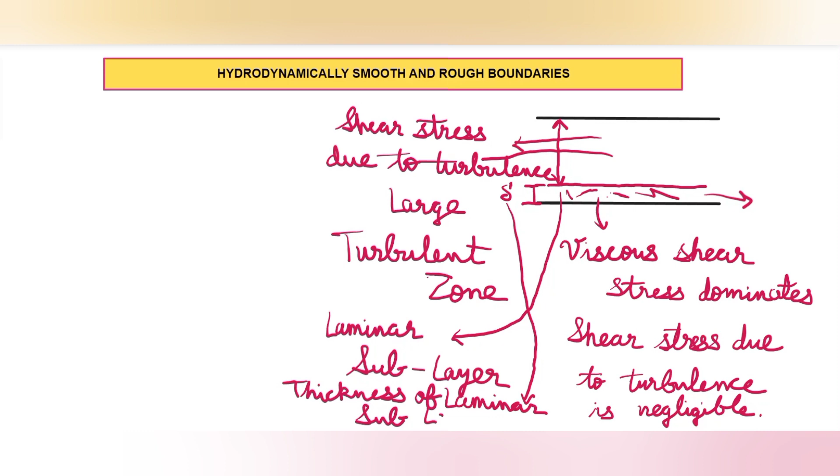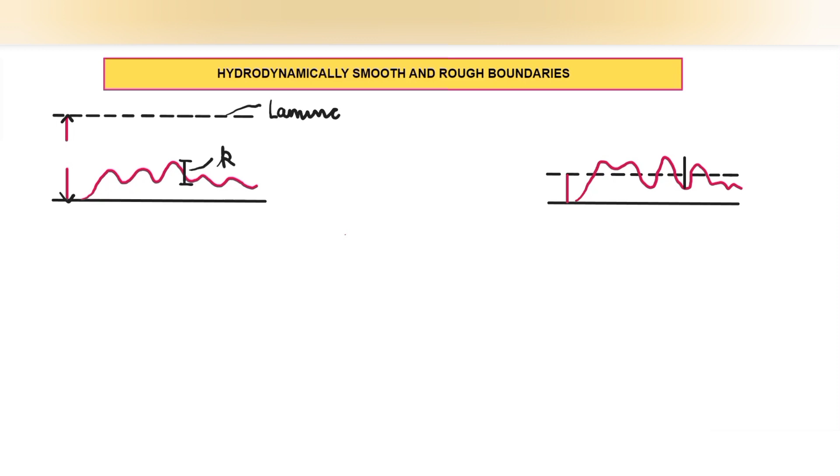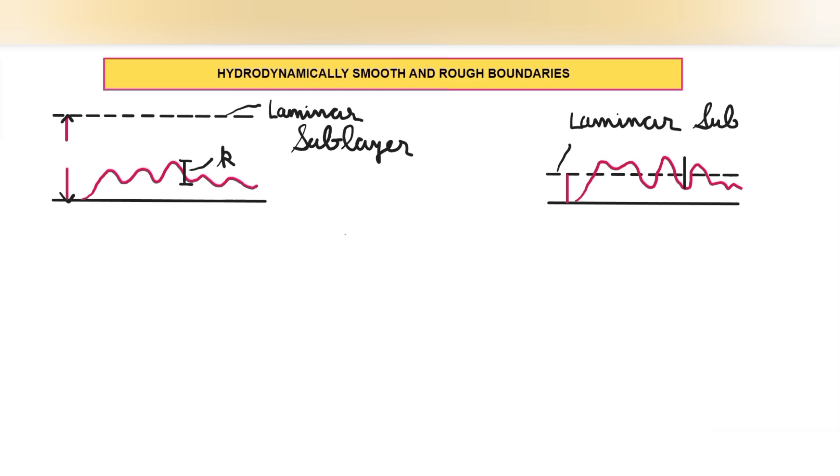Now let's understand the difference between hydrodynamically smooth boundary and hydrodynamically rough boundary. As you can see in the diagram, these are my irregularities, and K is the average height of irregularities projecting from the surface of the boundary. This is my laminar sublayer, and in the second diagram, this is also my laminar sublayer, with thickness denoted by delta dash.

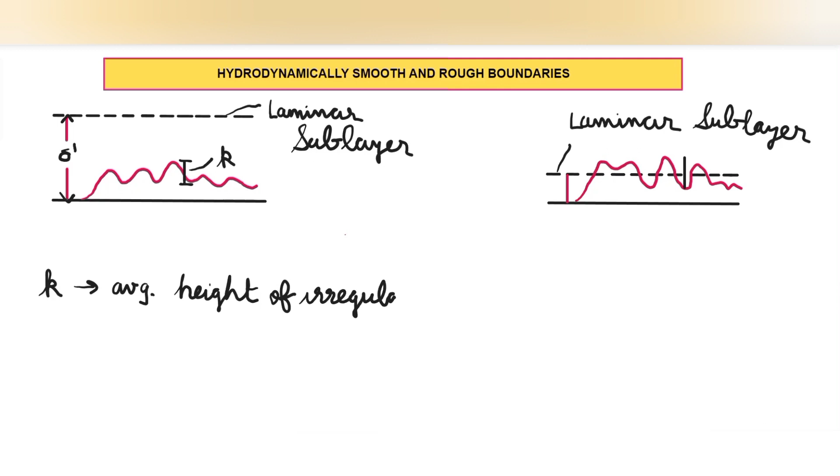Now as you can see in this first diagram, the average height of irregularities is quite small compared to the thickness of the laminar sublayer. That means K is less than delta dash. This type of boundary, where K is less than delta dash, is known as hydrodynamically smooth boundary.

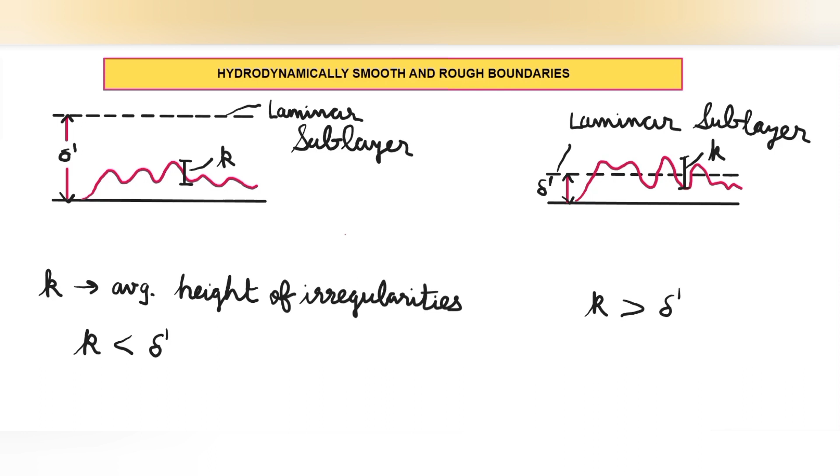In the other diagram, the average height of irregularities is more compared to the thickness of the laminar sublayer, that is, K is greater than delta dash. This becomes my hydrodynamically rough boundary. So the first diagram is smooth boundary and the second is rough boundary. For smooth boundary, K is less than delta dash; for rough boundary, K is greater than delta dash.

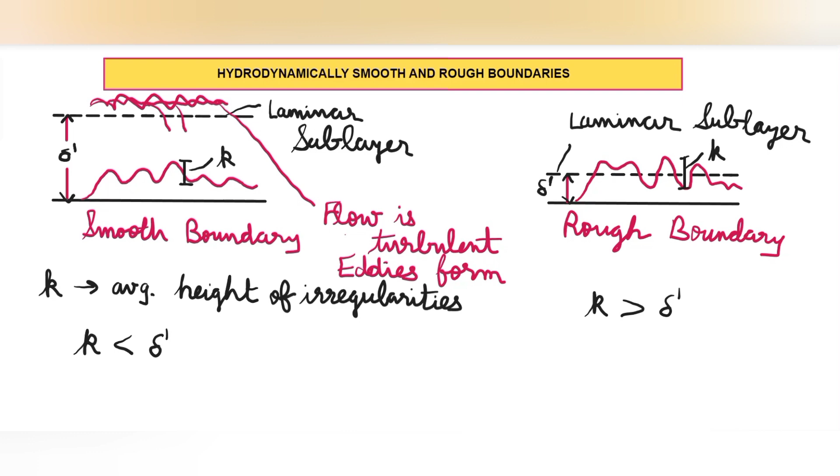Another thing to understand: above the laminar sublayer, where the flow is turbulent, eddies formation starts, and these eddies will try to penetrate the laminar sublayer, trying to come close to the boundary.

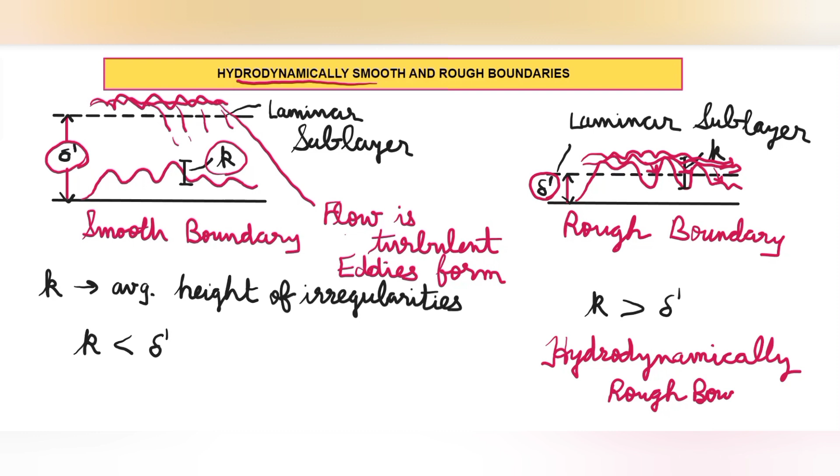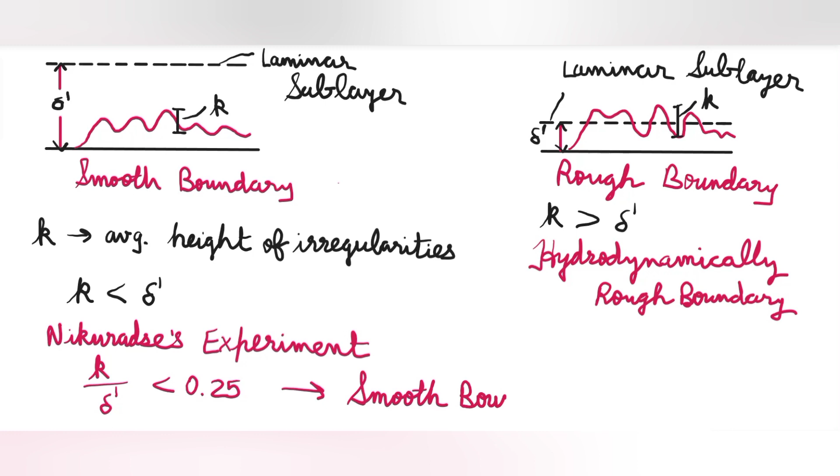The next thing we want to see is there are some values given by Nikuradse and Reynolds by which we can decide whether a boundary is smooth or rough. Let's see both of these: Nikuradse's experiment and the Reynolds number criterion. As per Nikuradse's experiment, it is related to the K upon delta dash ratio. If K upon delta dash is less than 0.25, then that type of boundary is called smooth boundary.

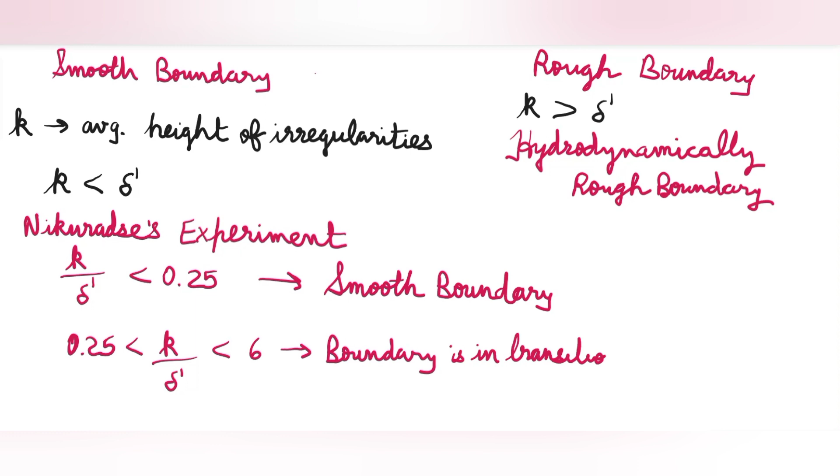Then, if K by delta dash is between 0.25 and 6, that type of boundary we call boundary in transition. You need to remember two values, 0.25 and 6, and the ratio is K by delta dash, that is average height of irregularities to thickness of the laminar sublayer. And if K by delta dash is greater than 6, then that boundary is a rough boundary.

Same way, Reynolds has also given a classification, as per Reynolds it is U star K by nu. U star is the shear velocity, K is the average height of irregularities, and nu is the kinematic viscosity. So for U star K by nu, if this ratio is less than 4, we call that boundary a smooth boundary. If this ratio is between 4 and 100, the boundary is in transition. And if U star K by nu is greater than 100, the boundary is a rough boundary.

So for Nikuradse, K by delta dash, two values are 0.25 and 6, and for Reynolds number, U star K by nu, two values are 4 and 100. This is what you need to remember.

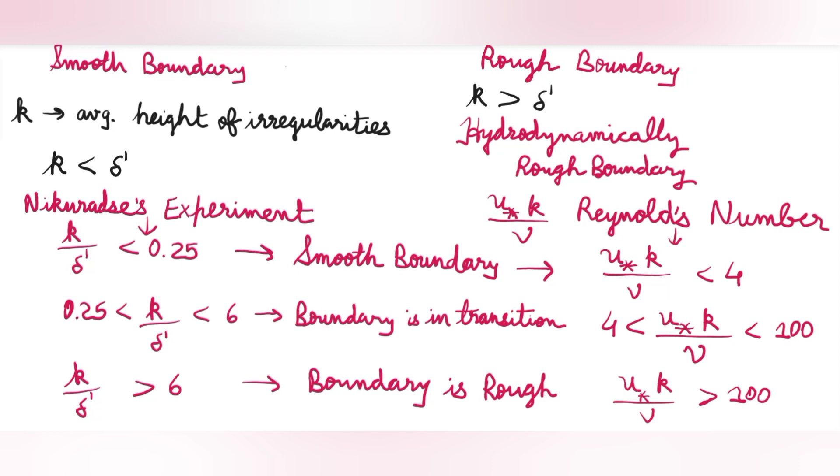Next, we'll derive the equation for velocity distribution for turbulent flow in smooth pipes and in rough pipes. Here we'll derive the equation for velocity distribution firstly in smooth pipes and then for rough pipes.

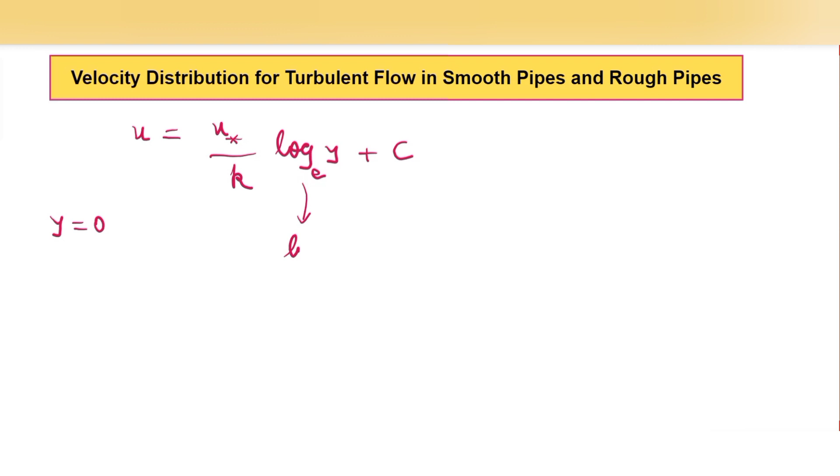We already know the velocity distribution equation for turbulent flow in smooth or rough pipe, which we had derived: U is equal to U star by K log y to the base e plus c. Here we can see from this equation that if I put y as 0, then u will come out as minus infinity, because log 0 is equal to minus infinity. That is, when y is equal to 0, then u is equal to minus infinity. At the wall where y is equal to 0, velocity is minus infinity. So away from the wall, there will be some distance where velocity is positive. We can say that at some finite distance away from the wall, velocity will be equal to 0.

Now that finite distance from the pipe wall, let's denote it as y dash. So we can say that when y is equal to y dash, velocity is 0. Placing these values in the above equation, we'll get u is 0. Therefore, 0 is equal to u star by k, and in place of y we put y dash: log y dash to the base e plus c. So we'll get c is equal to minus u star by k log y dash to the base e.

Now we can place the value of this constant of integration in our equation. U is equal to u star by k log y to the base e plus minus u star by k log y dash to the base e. So it will be u star by k times log y minus log y dash. Subtraction will change to division. Therefore we can write u is equal to u star by k log y by y dash to the base e.

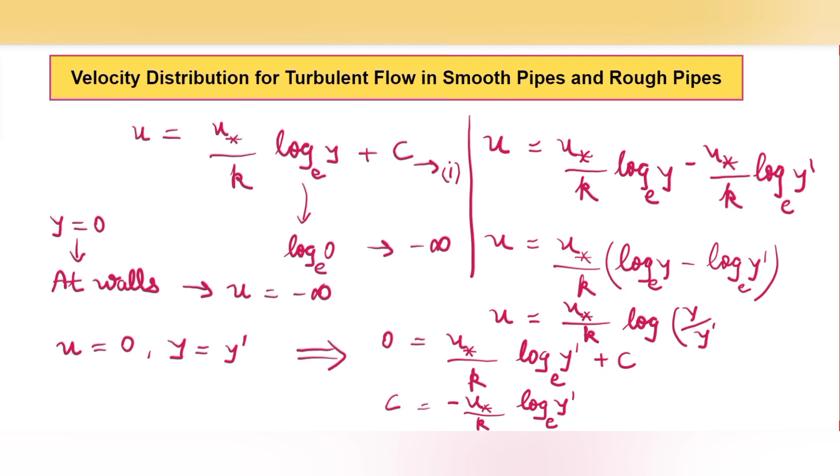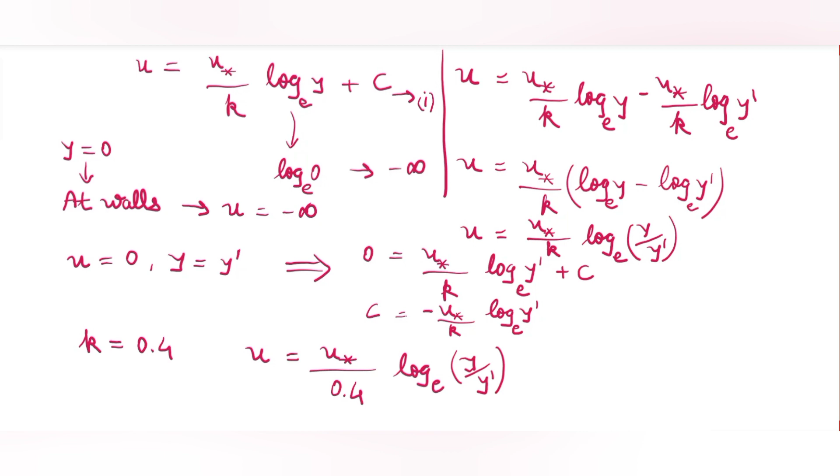Then we also know the value of Karman's constant, which is equal to 0.4. Placing that here, U is equal to u star by 0.4, which is equal to 2.5 u star log y by y dash to the base e. We can also change log base e to log base 10 by multiplying with 2.3: 2.3 into 2.5 u star log y by y dash to the base 10. This gives u by u star is equal to 5.75 log y by y dash to the base 10.

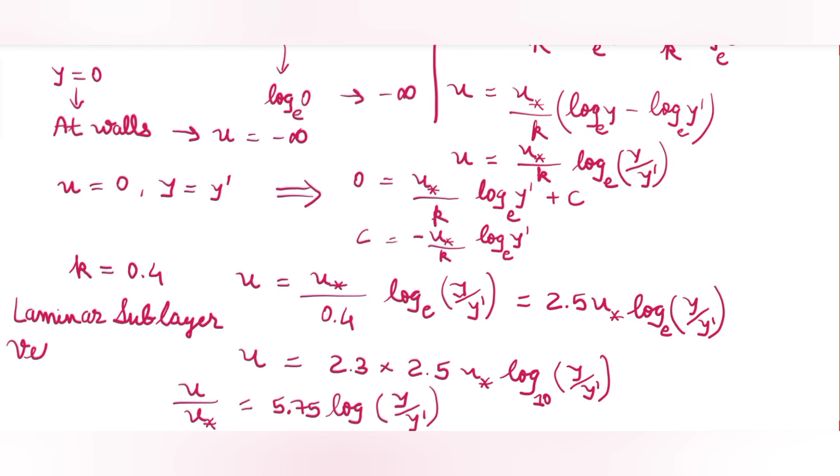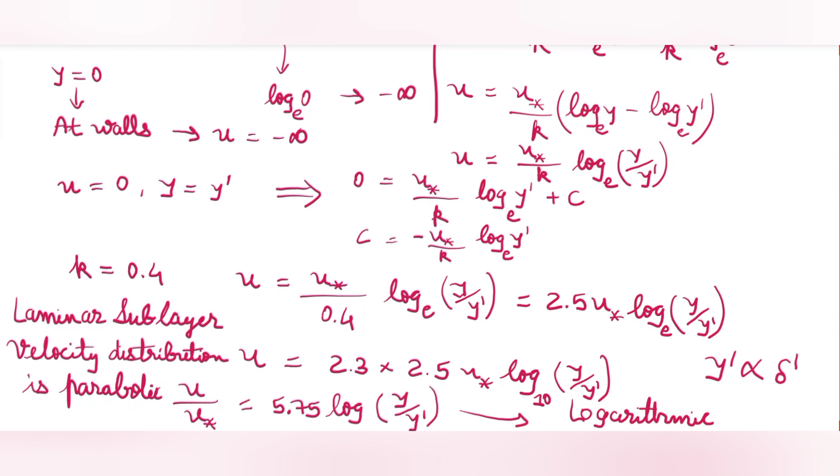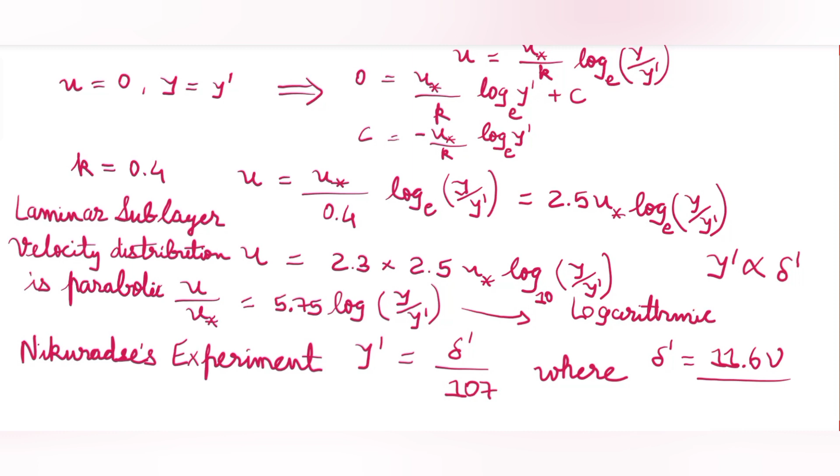Now for smooth boundary, there exists a laminar sublayer, and as discussed, as per the universal Prandtl's velocity distribution equation that we found, the velocity distribution was logarithmic in nature. But because the laminar sublayer exists, the logarithmic velocity distribution does not hold good, and the velocity distribution is parabolic in the laminar sublayer. So it was assumed that y dash is directly proportional to the thickness of the laminar sublayer, that is delta dash. As per Nikuradse's experiment, he gave the value for y dash, which is equal to delta dash upon 107, where delta dash is equal to 11.6 nu by u star. Nu is the kinematic viscosity of the fluid and u star is the shear velocity.

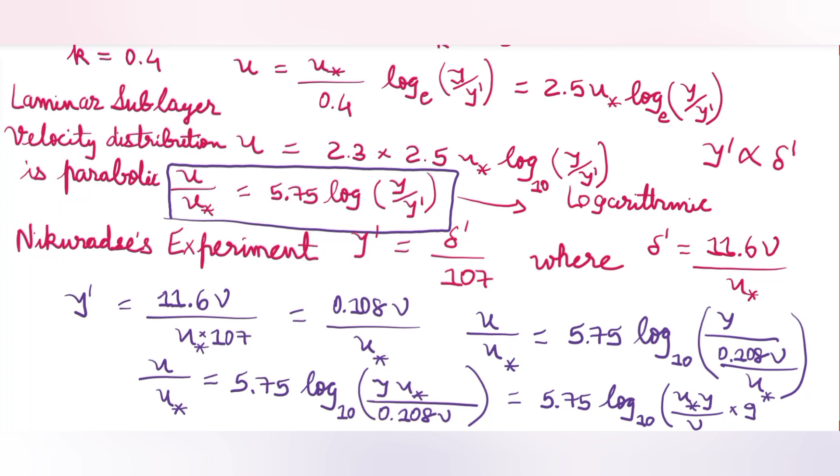We can place this. Y dash is equal to 11.6 nu by u star, into 107, because delta dash is 11.6 nu by u star, so we get 0.108 nu by u star. Now let's place this in the equation. U by u star is equal to 5.75 log y divided by y dash, which is 0.108 nu by u star. U star will go up, so it will be 5.75 log of u star y upon 0.108 nu, and 1 upon 0.108 is equal to 9.259. So we get u by u star is equal to 5.75 log of u star y by nu into 9.259.

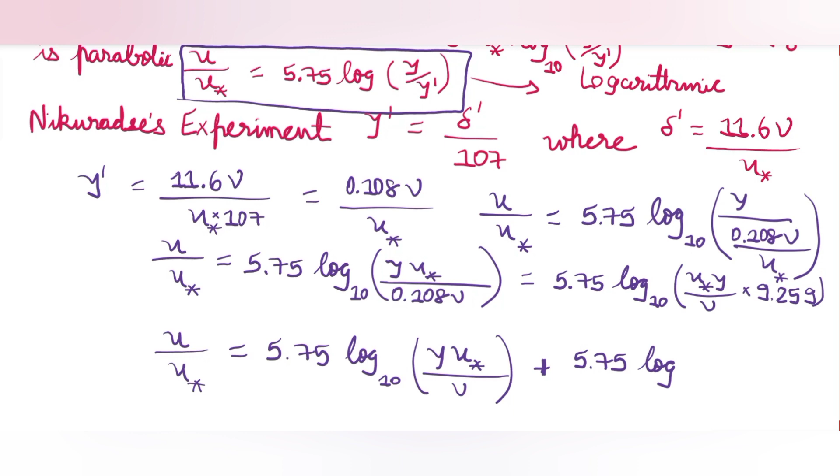Now this multiplication will change to addition. U by u star is equal to 5.75 log u star y by nu, plus 5.75 log 9.259, and log of 9.259 into 5.75 is equal to 5.55. Therefore we get u by u star is equal to 5.75 log u star y by nu to the base 10, plus 5.55.

So this is the equation that you need to remember for velocity distribution of turbulent flow in smooth pipes.

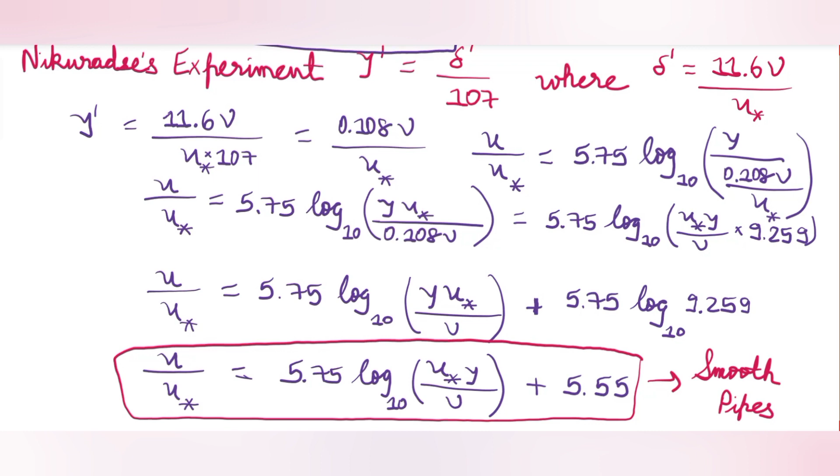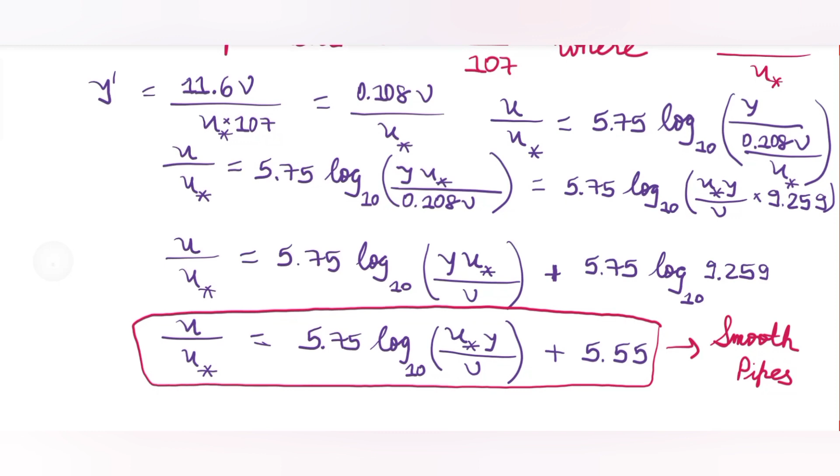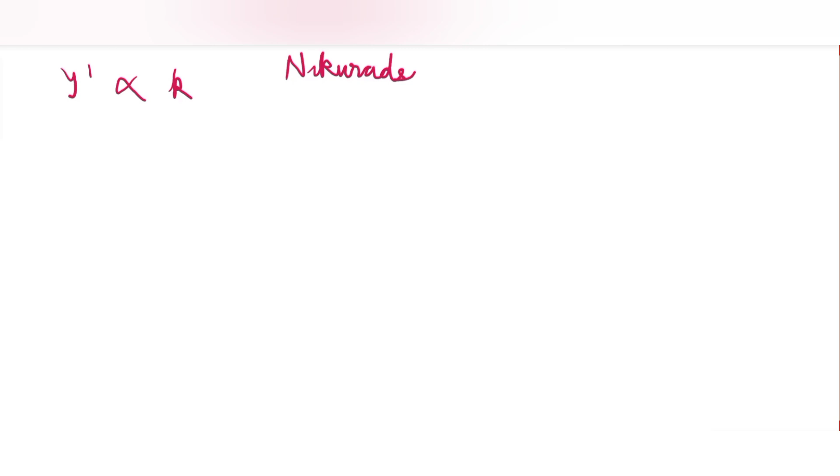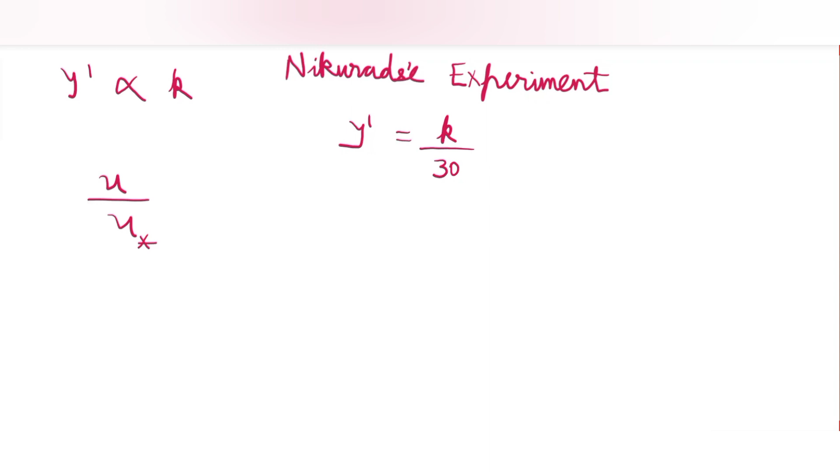Now let's derive the equation for rough pipes. For rough pipes, the main equation that we start from is this one: u by u star is equal to 5.75 log y by y dash to the base 10. But here, as we know that in the case of rough boundaries, the thickness of the laminar sublayer will be very small, it was assumed that y dash is proportional to the height of protrusions, that is the height of irregularities, which is k. And as per Nikuradse's experiment, he found that y dash is equal to k upon 30 for pipes coated with uniform sand, that is for rough pipes.

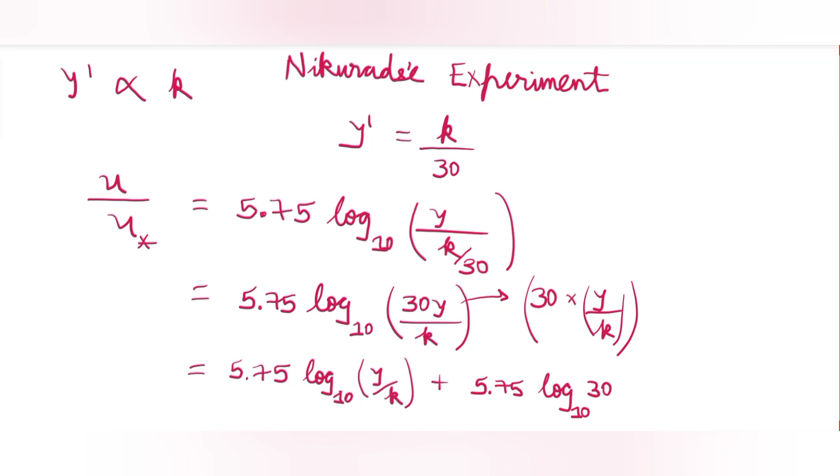So we have u by u star is equal to 5.75 log y by y dash, where y dash is k by 30. This becomes 5.75 log to the base 10 of 30 into y upon k. We can change this multiplication to addition: 5.75 log y by k to the base 10, plus log 30 to the base 10 into 5.75, and this log 30 to the base 10 into 5.75 comes out to be 8.5.

So we get u by u star is equal to 5.75 log y by k to the base 10, plus 8.5. This is the equation for velocity distribution for turbulent flow in rough pipes, which you need to remember.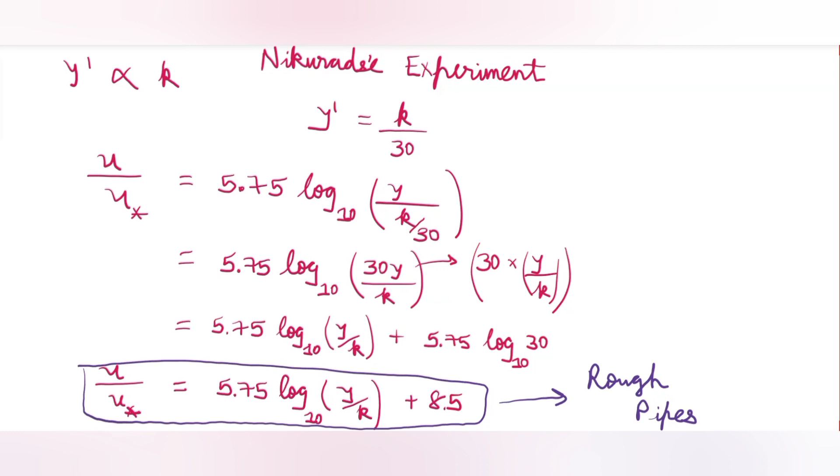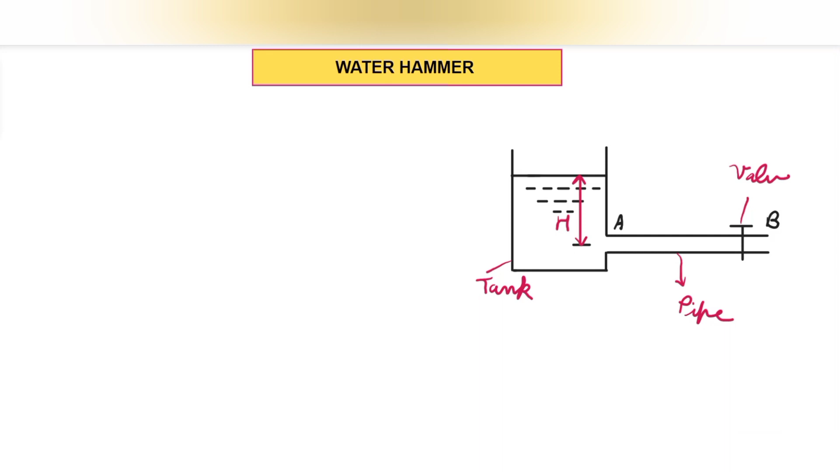The next important topic that we'll discuss is water hammer in pipes. Here we have considered a long pipe which is connected to a tank, and this tank contains water of height h from the center of the pipe. At one end of the pipe there is a valve which is regulating the flow of water.

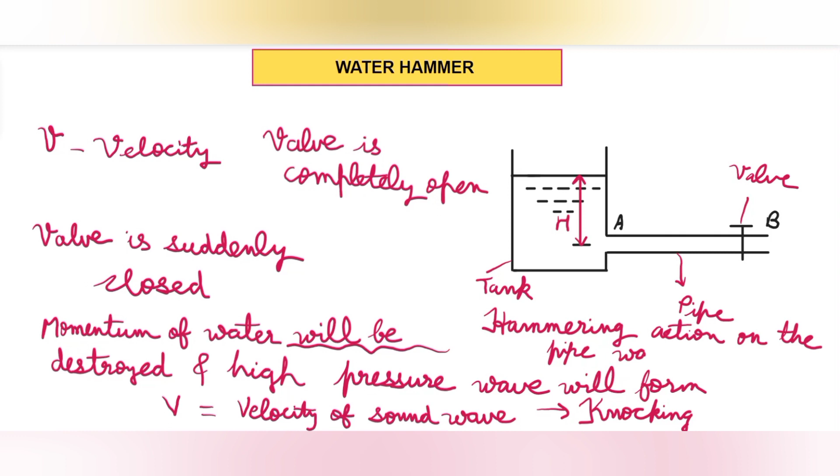And due to this high pressure wave, a hammering action occurs on the pipe walls, which we call water hammer. So here I'll write this: the momentum of flowing water will be destroyed and a high pressure wave will be generated. This high pressure wave's velocity is equal to the sound wave velocity, and it creates noise which we call knocking. Also, this high pressure wave creates a hammering action on the pipe walls. This is known as water hammer.

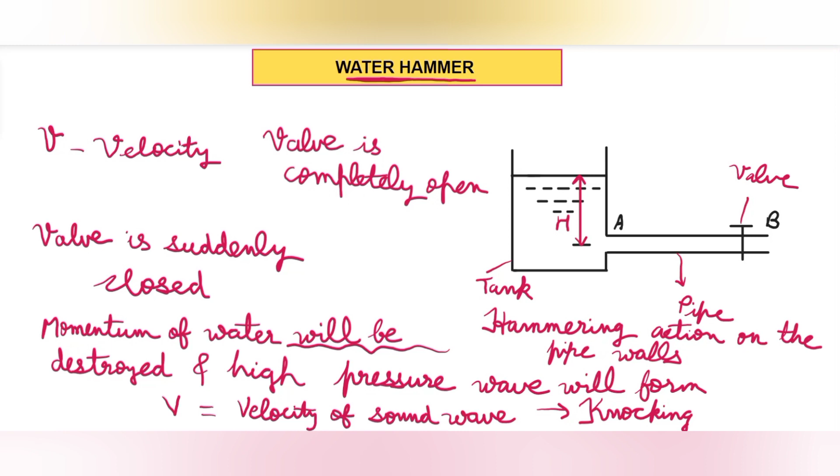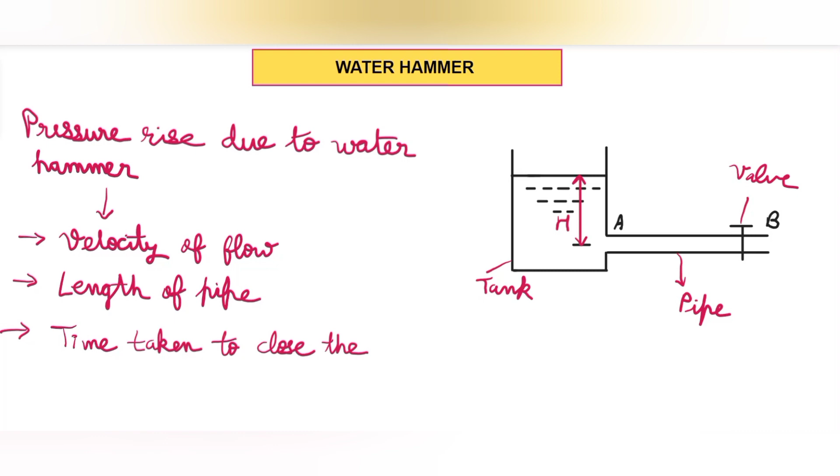The pressure generated due to water hammer depends on a few things: first is the velocity of flow of water in the pipe, then the length of the pipe, then the time taken to close the valve, and also the elastic properties of the material of the pipe. So velocity, length of pipe, time taken to close the valve, and the elastic properties of the pipe material — the pressure due to water hammer depends on the pipe material as well.

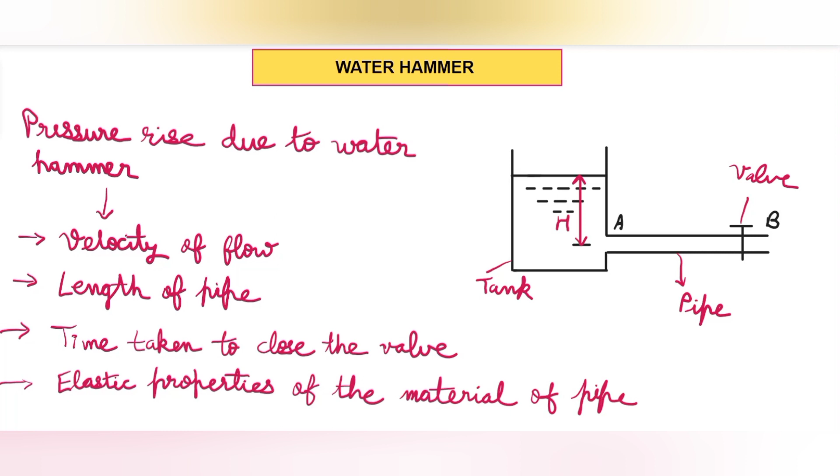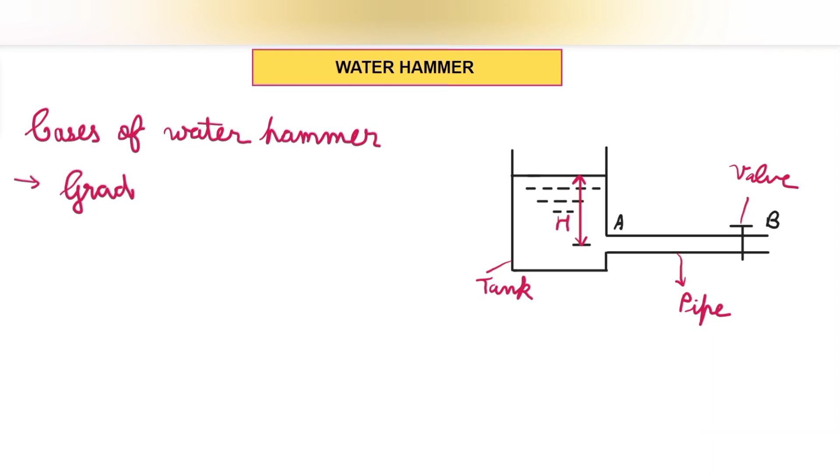We are having the cases of water hammer in pipes, which are 3 cases. Water hammer ke 3 cases hote hain. First one is gradual closure of valve.

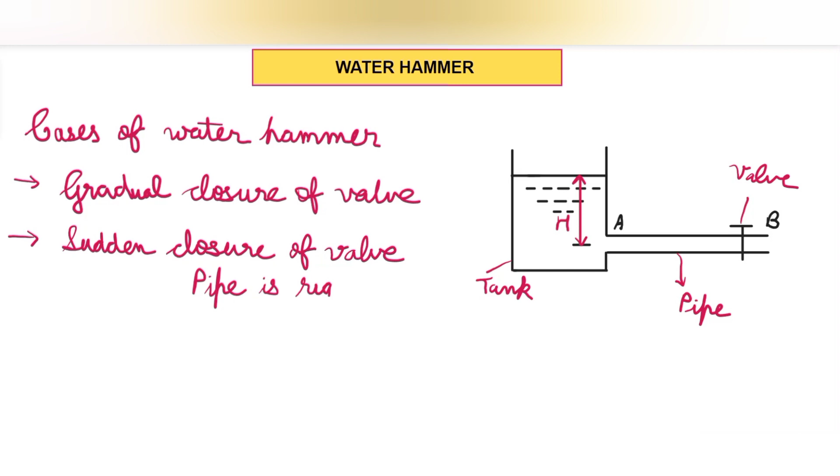Then we have sudden closure of valve. And during sudden closure, we consider two cases: one is that my pipe is rigid, and the other one is my pipe is elastic. These are the three cases.

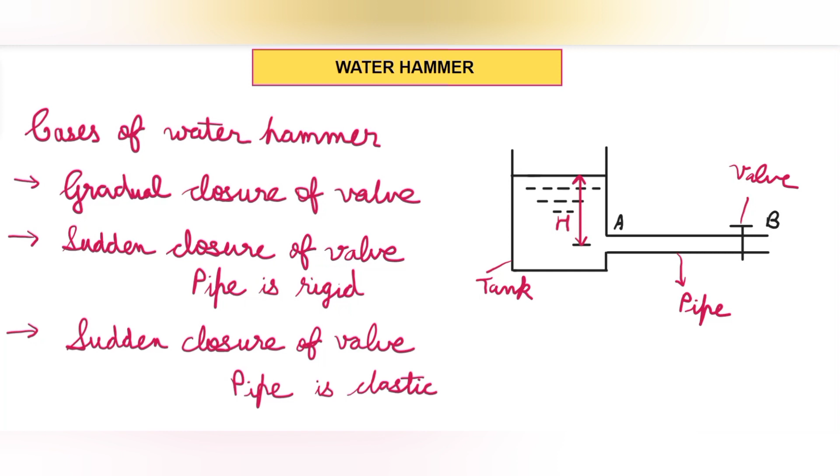For all of these three cases, we'll see the equation for intensity of pressure wave produced. Let's discuss for the first one, gradual closure of valve.

There is also a time limit when we can say whether it is gradual closure of valve or sudden closure of valve. That too we'll discuss.

Now here we have considered a pipe AB, which I had shown you in the figure, and there is a valve which is provided at the end of the pipe, which we are closing gradually. Instead of closing it suddenly, we are closing it gradually.

Then we have area of cross section of the pipe AB, which is A. L is the length of the pipe, V is the velocity of flow through pipe, T is the time in second required to close the valve, and P is the intensity of the pressure wave produced.

What is the mass of water in pipe AB? Mass we give as density into volume. Volume is equal to area of cross section of pipe into length of the pipe. So we can say that the mass of water in the pipe AB is equal to rho into A into L.

And this valve we are closing gradually in time t seconds. So the water will be brought from initial velocity v to zero velocity.

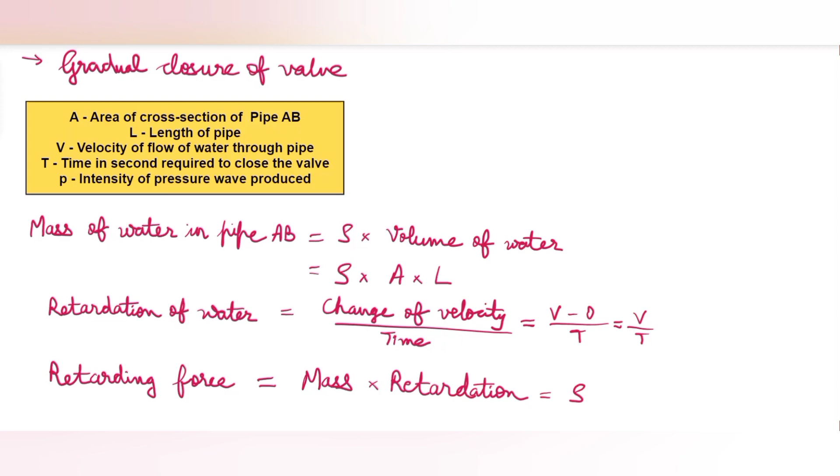Now we have denoted the intensity of pressure wave produced as small p. So we can say that force due to the pressure wave will be equal to this intensity of pressure wave produced into area of pipe, which is P into A.

Now we can equate both of these forces, which is retarding force and force due to the pressure wave. So we get P into A is equal to rho AL V by T. A will get cancelled. P is equal to rho LV upon T. So this is the equation for intensity of pressure wave produced.

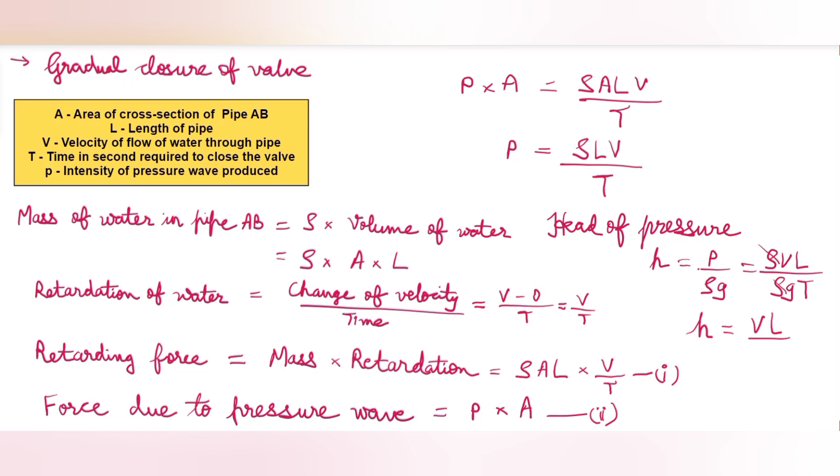Then we also have the equation for head of pressure, which we can give as H is equal to P by rho G. P is rho VL upon T, and dividing it by rho G will get rho VL upon rho GT. Rho will get cancelled, so H is equal to LV upon GT.

The other important thing that we need to remember is, if we say that the valve closure is gradual, then T is greater than 2L upon C. Here this C is velocity of the pressure wave. T is the time in second, L is the length of the pipe. So if T is greater than 2L by C, then it is gradual closure of valve, and if T is less than 2L upon C, then it is sudden closure of valve.

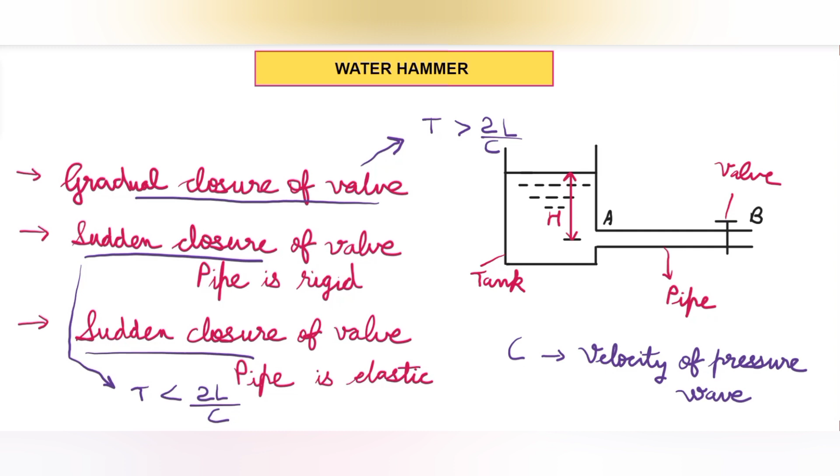So for gradual closure of valve, we have two important equations. Here let me just make it this as capital H. One equation is for intensity of pressure wave produced, and another one is for head of pressure.

Same way, we also want to derive the equation for P for the case of sudden closure of valve when the pipe is rigid. As you can see in this equation, P is equal to rho LV upon T. When T will be 0, then P will be equal to infinity. Why 0? Because we are closing the valve suddenly, so we can say that our time is 0, hence P will become infinity.

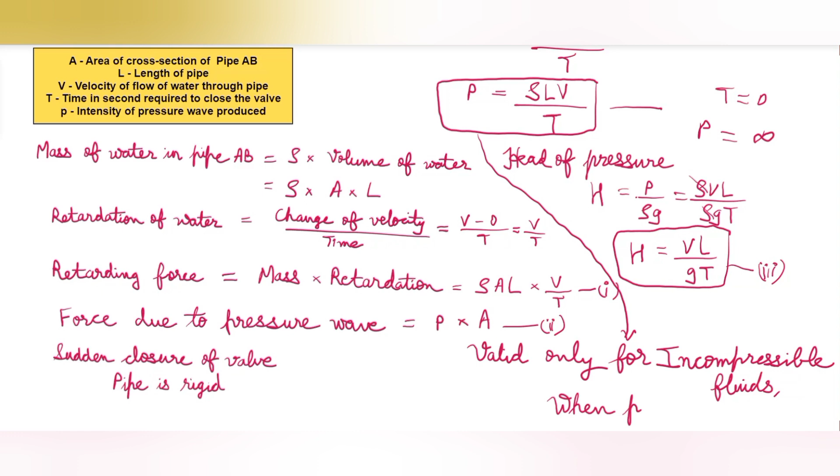But from experiments it was observed that the pressure due to water hammer is not infinity, it is finite. When I'm closing the valve suddenly, I have some finite pressure generated. So because of this, the equation P is equal to rho LV upon T is only valid for incompressible fluids and when the pipe is rigid.

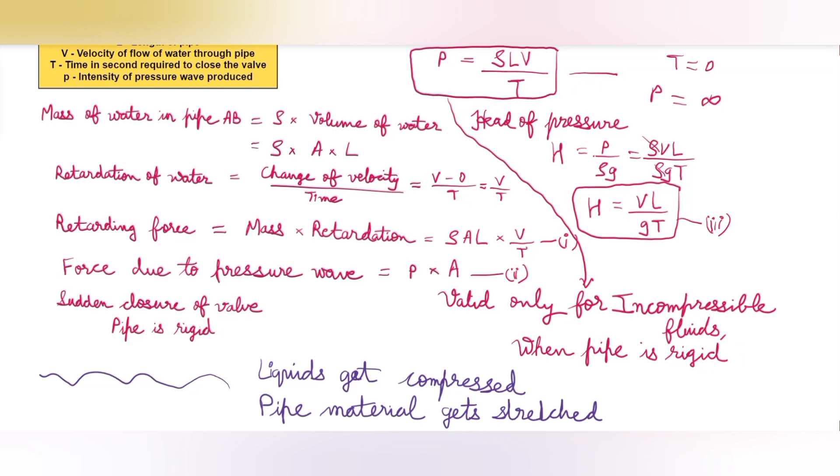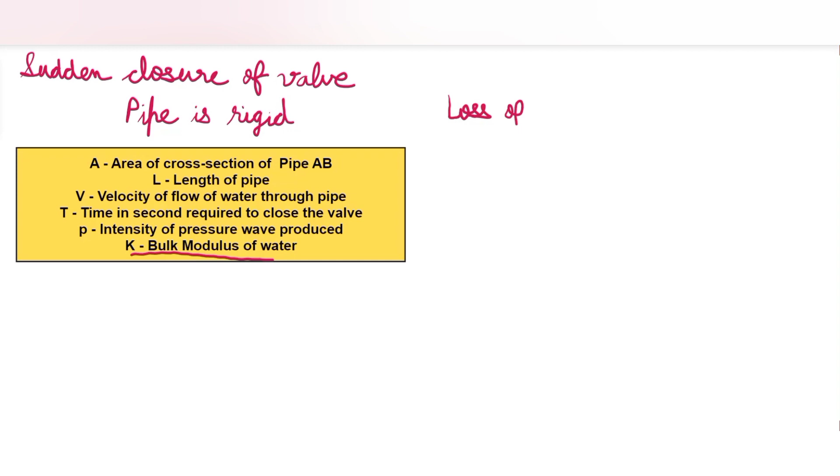Now loss of kinetic energy is equal to 1/2 mv square, where m is rho AL. Therefore it will be 1/2 into rho AL v square. Then gain of strain energy is given by the equation 1/2 P square by K into volume.

So 1/2 P square by K into volume is equal to A into L. Then we compare both of these equations: loss of kinetic energy is equal to gain of strain energy. On equating both, we get 1/2 rho AL v square is equal to 1/2 P square by K into AL. Now this AL will get cancelled and we'll have P square is equal to 1/2 rho AL v square into 2K upon AL.

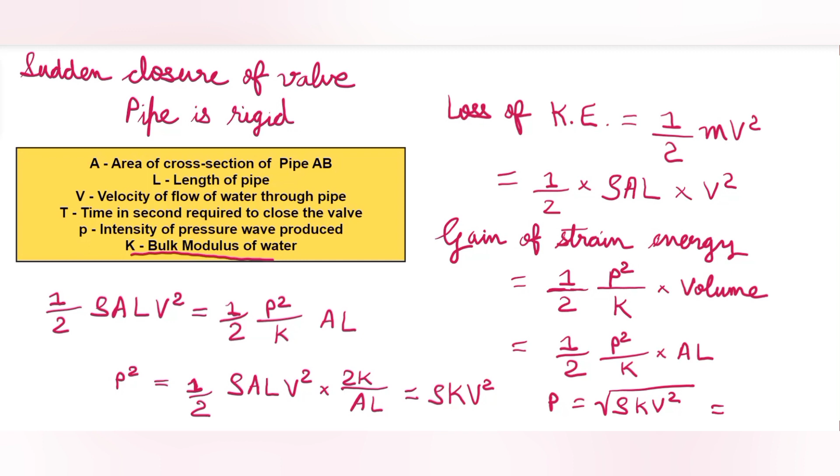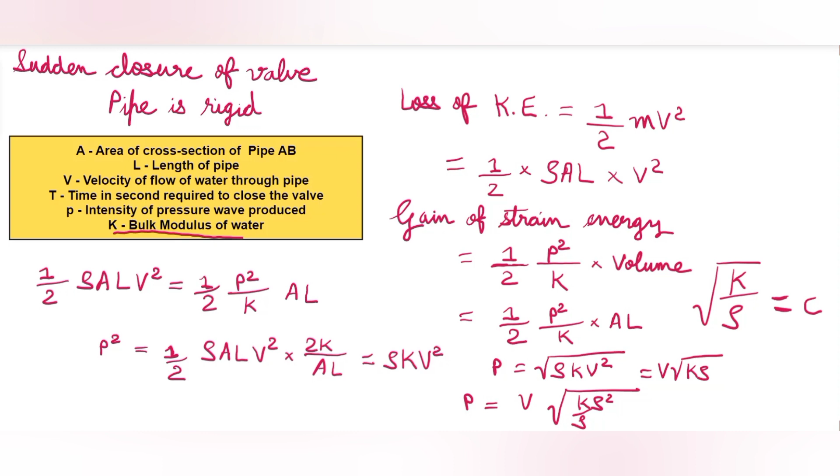Now let's cancel this AL, so we have P square is equal to rho K v square. The 2 will also get cancelled, and P is equal to under root of rho K v square. So we'll have P equal to V root K rho, and this K we are multiplying and dividing by rho. This K by rho, under root of K by rho, we call it C, which is velocity of the pressure wave. Therefore we'll get P is equal to rho VC.

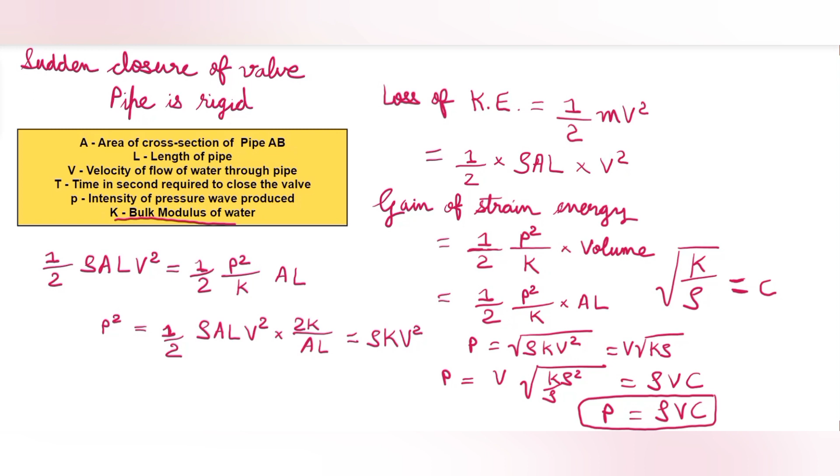This is the equation that you need to remember when the pipe is rigid. Now we have the case of sudden closure of valve when the pipe is elastic. This derivation is not asked, so we are not going to derive it.

Few terms have been added here: modulus of elasticity of the pipe material, then 1 upon m is the Poisson's ratio, and T is the thickness of the pipe wall. Then we'll see the magnitude of the longitudinal stress in pipe and circumferential stress in pipe. Here also we assume that the thickness of the pipe is small compared to the diameter of the pipe and the pipe is elastic.

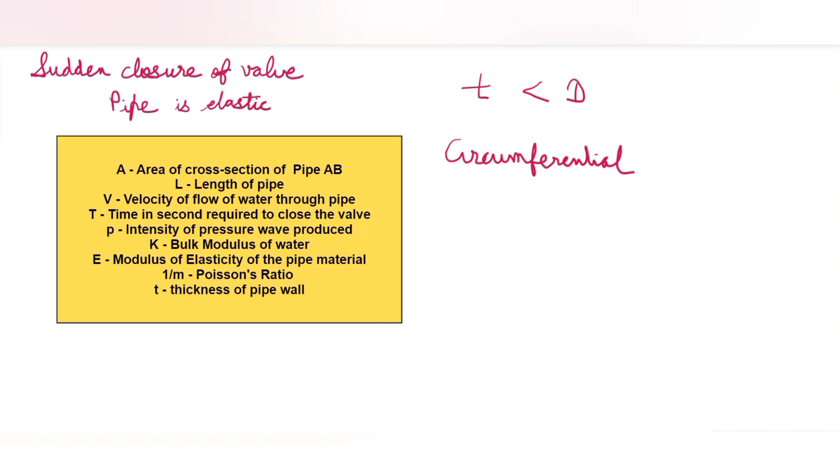We can give the circumferential stress in pipe using this equation: Fc is equal to Pd upon 2T, where D is the diameter of the pipe, T is the thickness of the pipe wall, and P is the increase of pressure due to water hammer. And then we have the longitudinal stress in pipe, which we can give by the equation Fl is equal to Pd upon 4T.

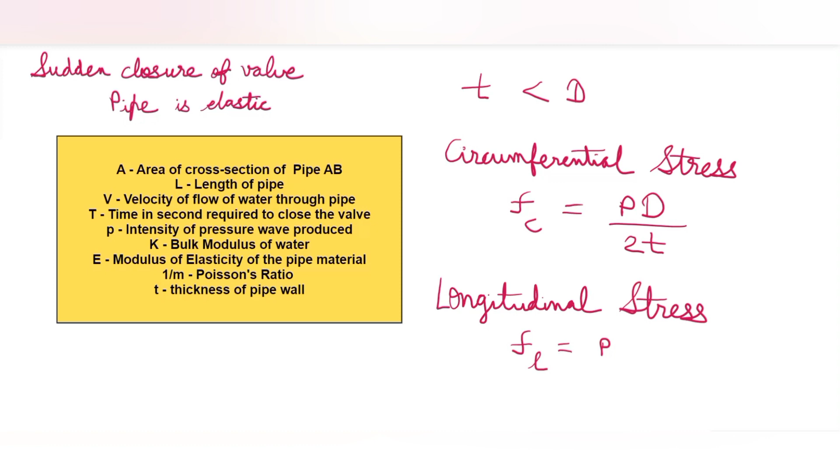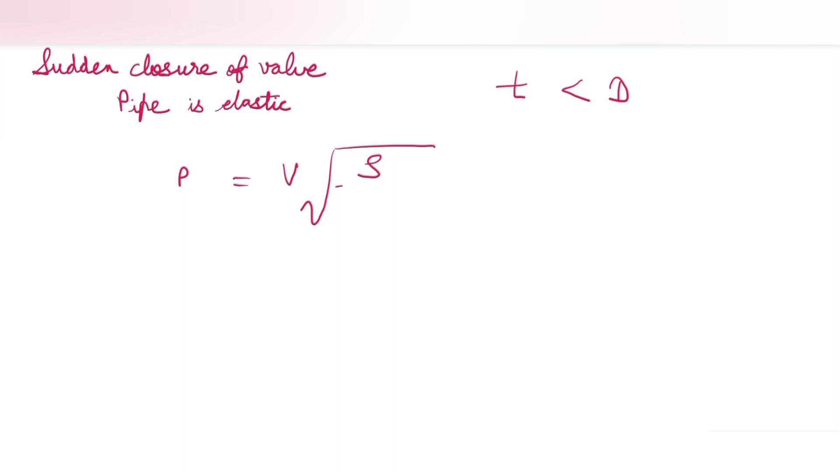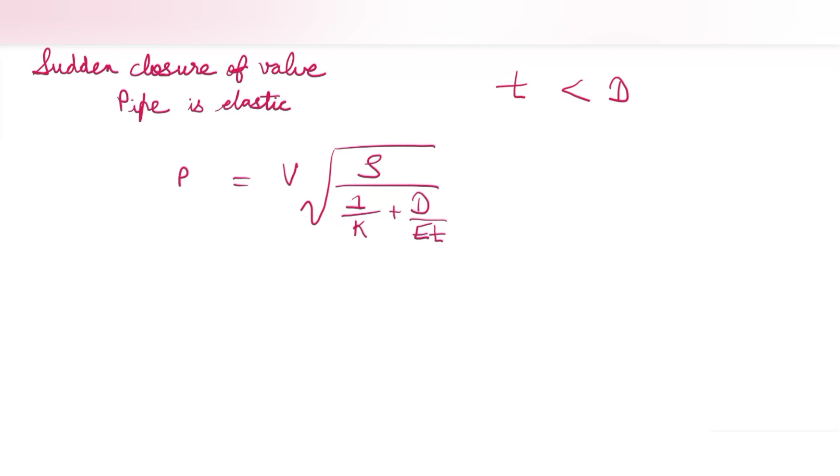And then our main equation, the intensity of pressure wave produced, is given as P is equal to V into under root of rho upon 1 upon K plus D upon ET. This also you need to remember.

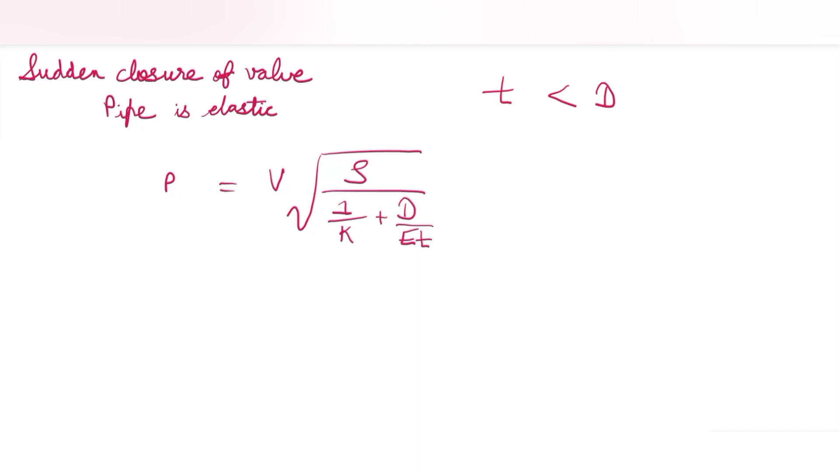With this, we have completed all the topics of turbulent flow, and in the next video we'll solve a few numericals based on turbulent flow. Thank you.